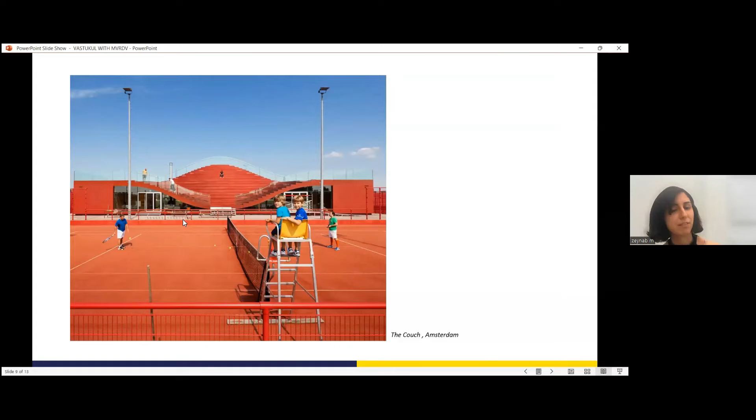MVRDV brings us together today. I bet every single designer among us, seeing the fact that we are attending, was inspired over the course of their education, training, or practice by MVRDV's designs. In my case, for example, as it could be for others, my first inspiration was the project The Couch, back when I was studying in architecture school, which to me seemed very simple, elegant, and really innovative. After that, I was really inspired by the Why Factory's vertical village concept. I'm sure that every one of us has a project in mind when he thinks about MVRDV.

If we look at their journey in the world of design, MVRDV was established in 1993. It's based in Rotterdam. Their aim was to transform landscapes for a better future. So simple, yet very important, and I think that they definitely succeeded. MVRDV has provided solutions to contemporary architectural and urban issues in all the regions of the world. Their highly collaborative and research-based design methods involve the clients, stakeholders, and experts. Their work is exhibited and published worldwide and has received numerous international awards. There are 250 architects, designers, and urbanists developing projects in a multidisciplinary collaborative design process.

Our guest speakers today bring different expertise from MVRDV. Let me start by introducing the first guest speaker, architect Mariya Gyaurova. Mariya graduated from UACEG with a master's degree in architecture. She studied architecture in Bulgaria and the Czech Republic. She has actively been a part of the diverse architectural project phases, from the concept design to the construction documents, and even construction site supervision, having this experience working at different offices in Sofia, Amsterdam, and Rotterdam. Mariya has been associated with MVRDV since 2012. Currently, she is the project leader, leading public and residential projects at different stages.

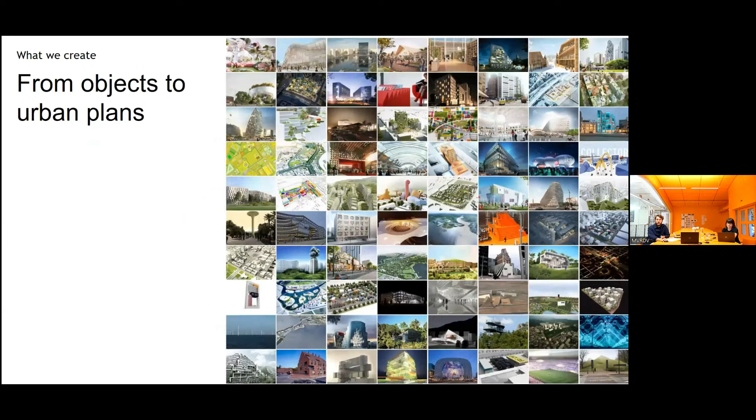Our scope of work is quite wide and goes from small objects to big urban plans that change the city. We could say that we do everything, but we learn from everywhere. We love this synergy of working in different fields, because one can teach you something that later you can apply to the other.

We believe in a highly collaborative, research-based design approach that always tries to answer global issues, but always with a contextual answer referring to the culture of the place. We don't copy elements from one place to another; we always try to understand what is happening on the specific site where we are locating our design.

We also try to be sustainable. Right now we aim to be 100% sustainable in the future. We're already taking actions like reducing our flights or having fully vegetarian, 100% local lunches in the office. Even this online lecture helps, since it isn't tied to a physical place, and I think online tools really give us a way to be more sustainable.

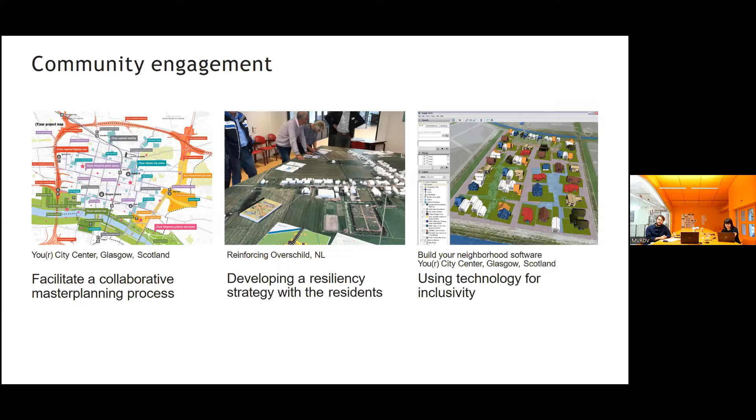We always try to involve and engage the community in our practice. This is part of the DNA of MVRDV. And through all of that, we try to share this knowledge through publications. I think Celia already showed the Vertical Village, or other books like KM3 or Farmax, which are among the highlight books we've done in the past.

And where are we located? As Jose already mentioned, MVRDV has offices in Rotterdam, Paris, Berlin, and Shanghai. Recently, our Paris office opened two weeks ago with an exciting exhibition called Agir, meaning 'to act,' where MVRDV and The Why Factory present the activist side of architecture and urbanism. But our true home is Rotterdam.

This is the MVRDV house, where we are right now, in one of the meeting rooms. We designed the interior of the house ourselves. It consists of a generous central space we call the atelier, which allows for immediate, informal discussions among colleagues, and different types of meeting rooms with various colors that celebrate diversity and improve creativity. If you have a meeting, you can pick a room matching your type of meeting, or your mood.

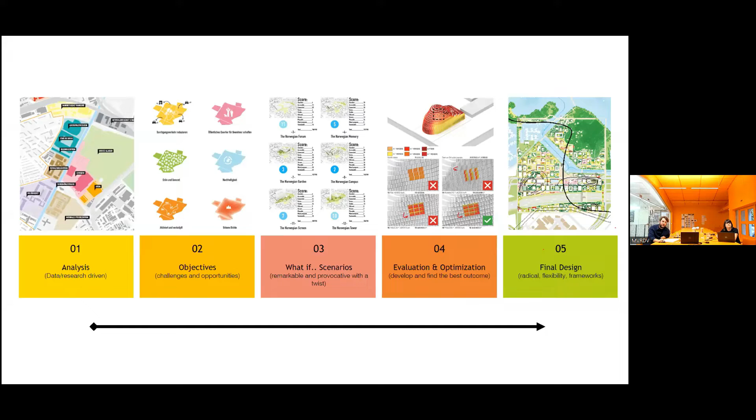So let's start first with analysis. For us, as we said at the beginning of this lecture, analysis is super important, because we believe in a research-based design process with clear steps towards an outcome.

Every project, in the end, is a result of a juxtaposition of thousands of different layers, from mobility, infrastructure, history, green, different. Of course, we never try to get to know all of them. It always depends on the project and its nature. Nevertheless, there are some which could be later really important for the project.

That's why we always try to analyze, for instance, the context. Analyzing the context and its dynamics is important to get to know the condition of the site. In this research, called Le Grand Puzzle, over 10,000 photographs of a street elevation were collected to map the city.

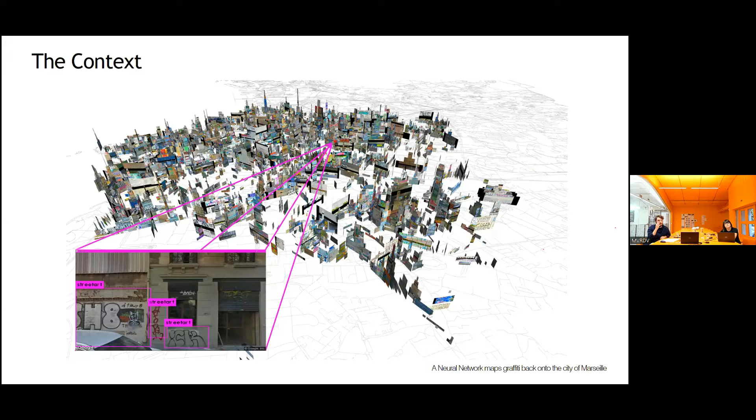Another layer that we always analyze is the program - the components, the relationship, the size, the grain of the program. Because when you discuss a master plan, it's not the same as creating a small residential block. The grain is quite different. This helps us later to be able to locate them in a correct order.

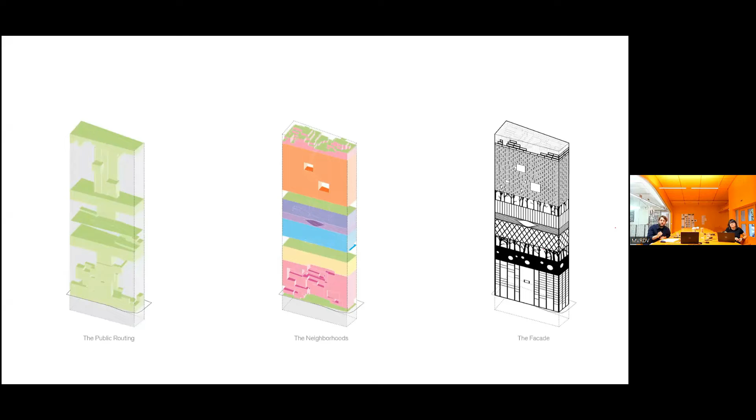Like in this tower in Australia, where each program becomes in the end a neighborhood on its own, giving a character to each block of the final stack.

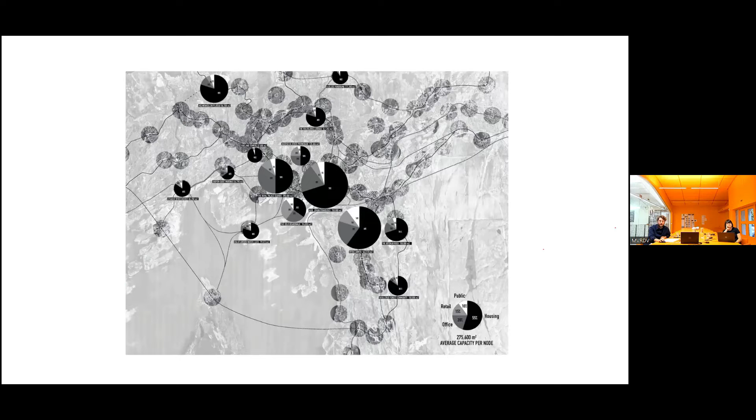Another layer to analyze is, of course, the infrastructure, especially nowadays where everything is hyper-connected - nodes, city centers, trains, etc. Understanding these nodes of transportation, travel times to the city center, accessibility, efficiency is important. Using this data in Oslo, we proposed to place all the program of the development along with the places with most potential for development, creating an equal level of densification throughout the city in this proposal.

Many times the best way to understand the constraints and opportunities of a site is through the inhabitants of it. In this case, our team worked with local communities and stakeholders to research the different problems of these sites, in the city center of Glasgow, across many layers.

What is their opinion about the green? What is their opinion about the public space, or basically the cultural elements that they have in the city? Their opinion about whether the streetscape is too busy, whether they want to pedestrianize the city center, or the mix of the city center. In the end, we got a holistic human perspective map, which unlocks all the potential of the city for this future vision of Glasgow.

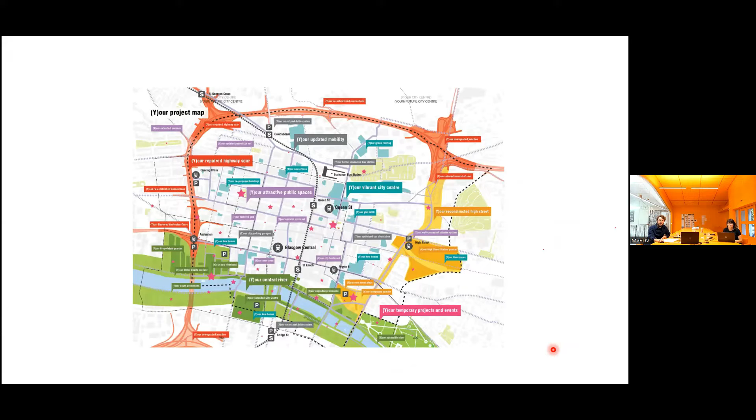And in the end, what we did is propose a series of projects that will collectively contribute to the upgrades of the city.

Another layer that we always try to analyze is the green. Why? The green network is a really important layer nowadays because we need to consider it and care about it. It's the base for all the biodiversity, and in the end, it's our connection to nature.

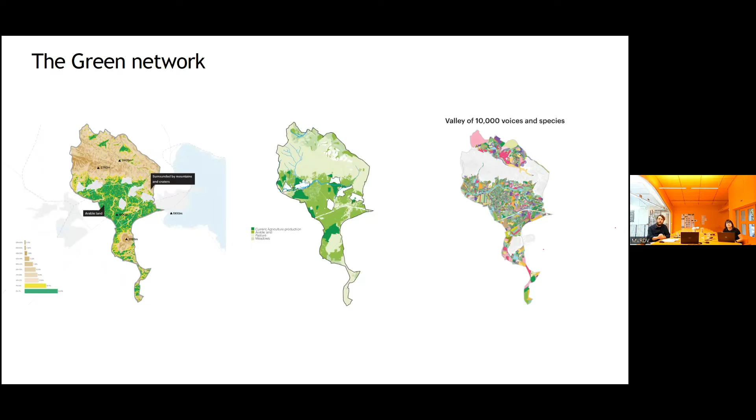In this valley in Armenia, our team did a really deep research of the current green networks and landscapes that was basically necessary to envision. Thanks to that analysis, the team could propose an amazing patchwork of over 10,000 different gardens that will enrich this area and connect the inhabitants even more to nature.

Another element to analyze is the future users, who will be populating our design - who they are, and how they will like to live. What are their needs? What do they need to create their own house?

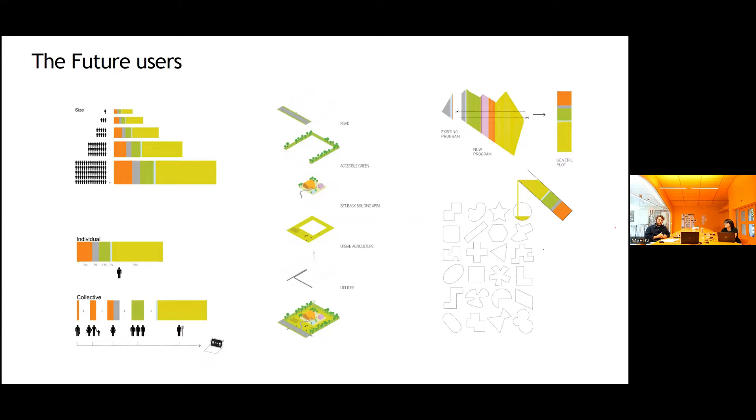For example, we could study the needs of the future user of this master plan to later design rules that will help them build their own plot house, ending up in this multiple patchwork of identity, like this plan in Almere, Oosterwold, where everybody can do whatever they want - if you want to live in a dome or a square, it's possible. You just need to follow basic rules, and you develop. It's like a do-it-yourself master plan.

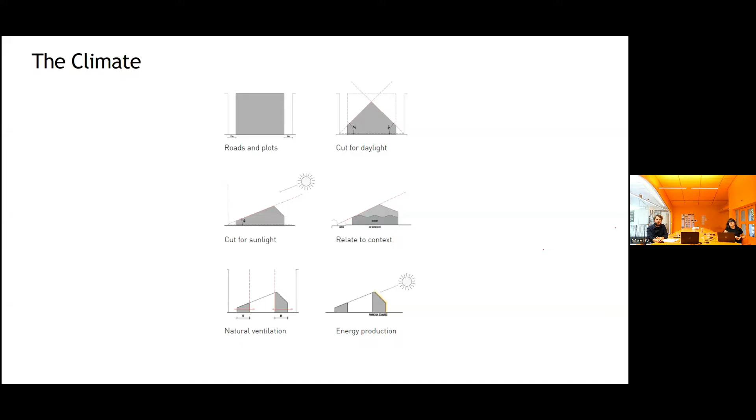Another important layer we analyze is the climate, and rules like daylight and direct sunlight could shape the building in a way that each building receives sunlight at ground level for a minimum of 2 hours. In this situation, these sun angles we create, combined with a 15 meter depth of the buildings, are the architectural rules that define the regeneration of this neighborhood in Bordeaux.

And last but not least is our beloved regulation. Many times we like to visualize and present this influence of regulation on buildings. By doing so, sometimes we're able to create unexpected forms that go beyond artistic intuition or geometries that you will normally know. We could say it's like a data-driven design.

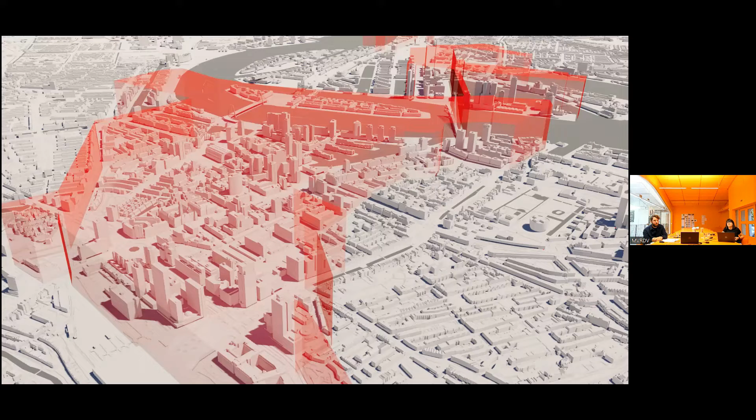This is a representation of Rotterdam, and currently in Rotterdam there are over 100,000 apartments planned to be added to the stock of the city, with a height of up to 200 meters. So as citizens, because we live here, we worry about how the streets will look, whether they're going to be really dark, or whether you will miss parks, for instance.

So we question this because we don't believe in absolute constraints, like the rule being fixed. Instead, we could say that as long as you don't cast too much shadow on a sunspot, you can do whatever you want as a developer, which we could call performative constraints. As a result, many more urban development possibilities are released from one single change of the sentence. This is basically a representation of the many possibilities that could arise just by following this performative rule.

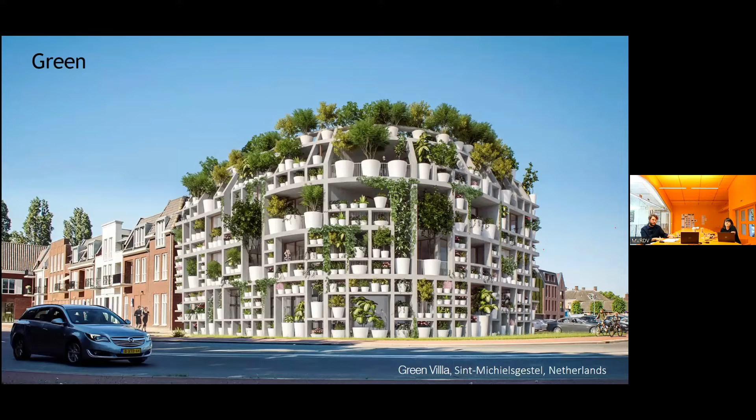Through analysis, we find the challenges and the opportunities in each project. We define our objectives: to be more green by bringing vegetation to the building facades and the roofs.

To be more dense by, for instance, creating instead of a cluster of freestanding buildings, a singular mountain structure with peaks and valleys, an efficient slab where more than 1,000 apartments are unified in one building, as we did in the project in Pune, the Future Towers.

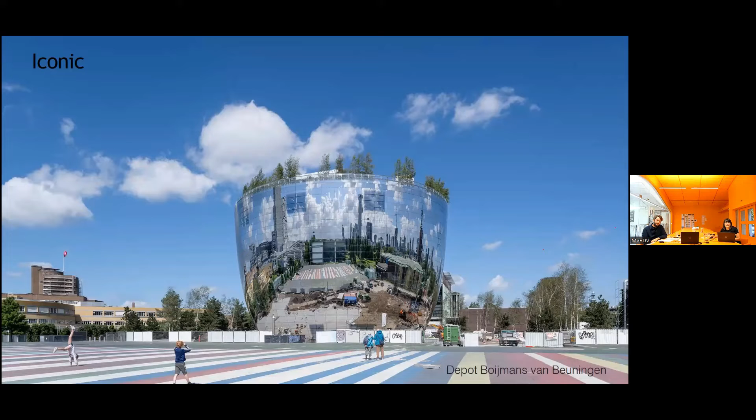Or to be iconic and to become the symbol of a city. This is the Depot Boijmans van Beuningen in Rotterdam that opened in 2021. It's the world's first publicly accessible art storage facility, and we believe an architectural symbol of Rotterdam.

We aim to create flexible spaces by designing buildings with extra high ceilings that allow for mezzanines and multiple changes in the floors added by future users, or by placing the circulation on the outside and completely clearing up the interior so that it can be 100% flexible and easily reconfigured.

But we also want to be fun. This is the project we did for a Dutch carpet manufacturer, and it is a patchwork of different colors and textures. What's really important to mention here is that it was created from the leftover threads from the production of other carpets.

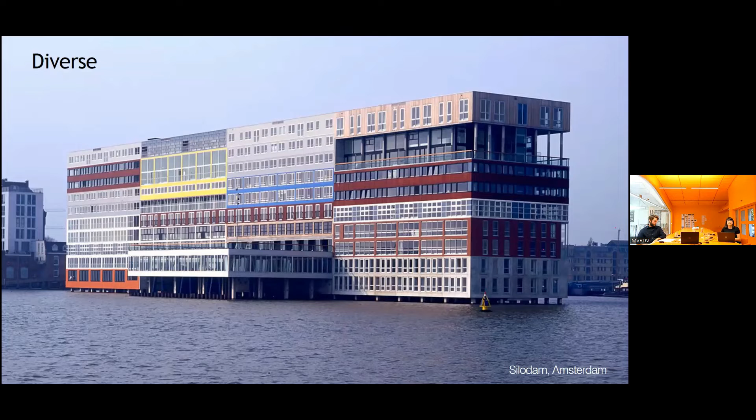We want to create diversity by combining various programs and types of apartments under one roof, like the building Silodam in Amsterdam, which is a stack of different neighborhoods, each with its own identity in terms of circulation, organization, units, and facade. It's a mixed program of housing, offices, workspaces, commercial spaces, and public spaces, arranged under one urban envelope. The apartments themselves differ vastly, not only in size, but also in price and organization.

And we want to create human scale designs. We aim for collective spaces where people can meet and share, spaces where we can all be together.

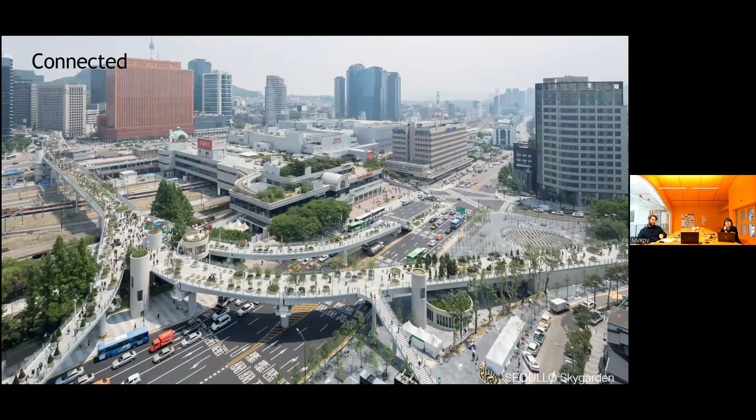We want to be connected by transforming, for example, an existing overpass into a public garden. This is a project we did in Seoul, changing the daily life of thousands of people who cross Seoul city center every day, and also every night.

And of course, we want to create pleasant places by creating more green and pedestrian areas in the cities. We aim to be sustainable by, for example, creating new possibilities for waste materials and inventing a completely new product.

A new product, like in this project, the High Profile, which was inspired by a visit of the team to the factory where they spotted the stack of aluminum profiles and all this raw material and waste. It became actually the starting point of the design.

In that way, we also designed the Bulgari Jade-like facade in Shanghai, which is made of brass and recycled champagne bottles.

We aim to be innovative by using material in a different, unexpected, and unique way, creating new building techniques and working closely with a number of partners, like in the Crystal Houses in Amsterdam. The bricks were developed in close collaboration with the Delft University.

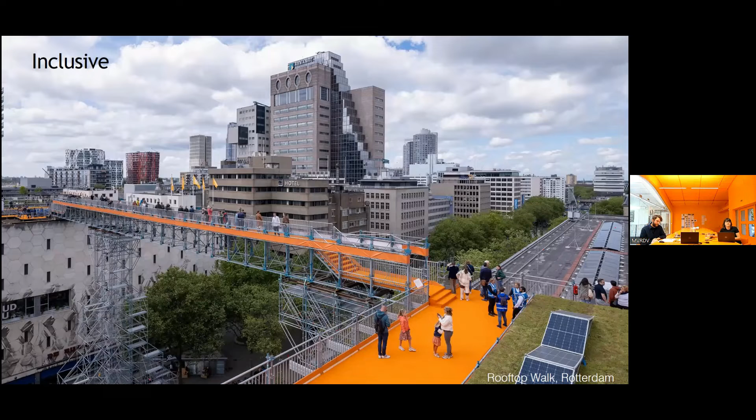So from this first analysis, these objectives and ambitions that we set, we ask the question of what do we do or how we do it. We need to answer those questions in a way that fulfills all those ambitions.

To do that, we do in our methodology what we call scenarios. Design for us is a result of this iterative process, which in the end allows the best design to emerge out of those. It's an outcome that is based on objectives and ambitions.

And these scenarios are created, for instance, based on different elements. We can create scenarios based on extremes.

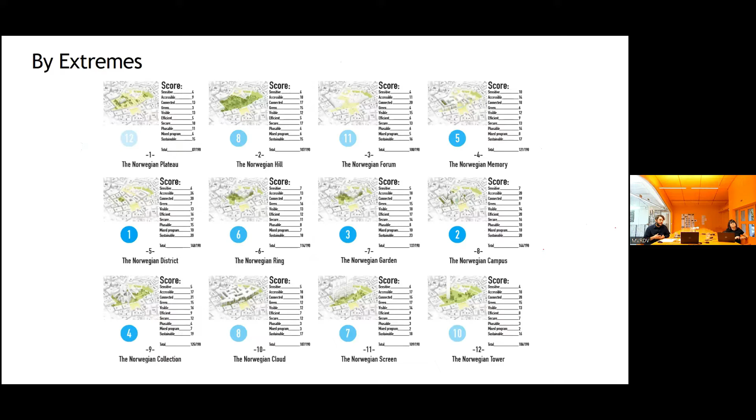In a way, we could think about radical elements or radical scenarios, like, for instance, create a plateau in this project, or we can create a big hill - what a huge hill will do to the city - or a garden, what if in this project we do a beautiful garden that welcomes everybody, even though it's a private plot.

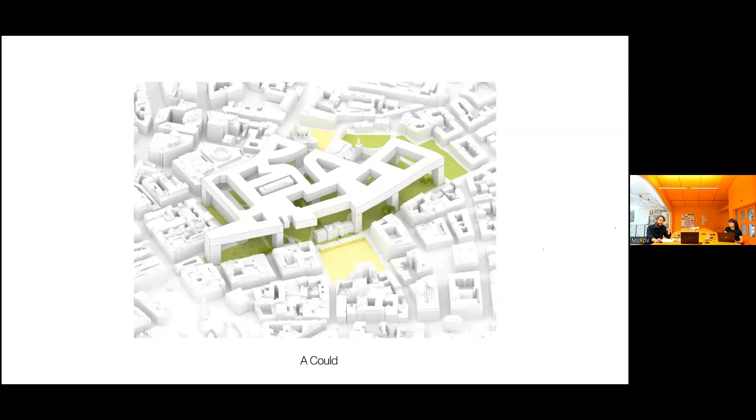Or what if we do a collection, a collection of different objects with different identities together that becomes this new icon in the city? Or what if we do a cloud, a cloud that basically serves as a canopy for this amazing plot, and the people can gather and play under it?

Or what if we do the biggest tower? I know Manhattan would love to have this, but what if we do it in Oslo, the biggest tower that you can see from everywhere in the city?

Or a campus, a beautiful campus with different identities and different buildings. You can choose where to live - you can live in the S building, or you can live in the courtyard, or in a tower.

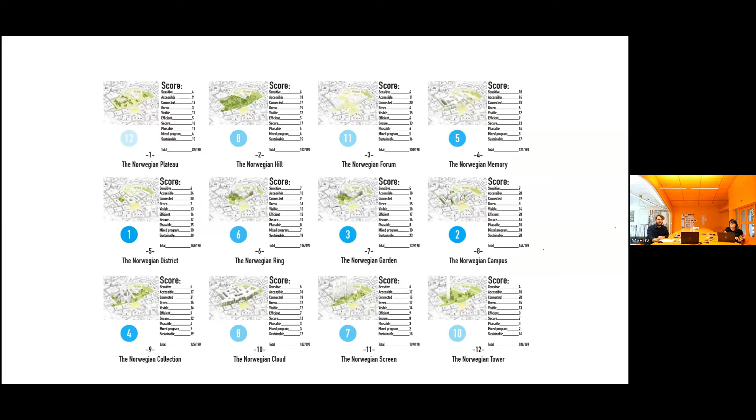These are scenarios, in the way we create them, because they are a benchmark from which our final concept will arise. Of course, by creating extremes, what we try to understand is what do they do, in order to choose the design that best serves the city - or sometimes it's as simple as just doing, in the end, a beautiful courtyard for this project in Oslo.

Many times, this scenario could be based on program distribution. These are pictures of our exhibition now in the New Institute in Rotterdam, where thousands of physical models were collected.

These different possibilities of organizing the program along a building - in this case, we create different ways to discover it. Do we simply stack the program, or can we create different identities along the building? Or we think about a route that through the whole tower you can discover.

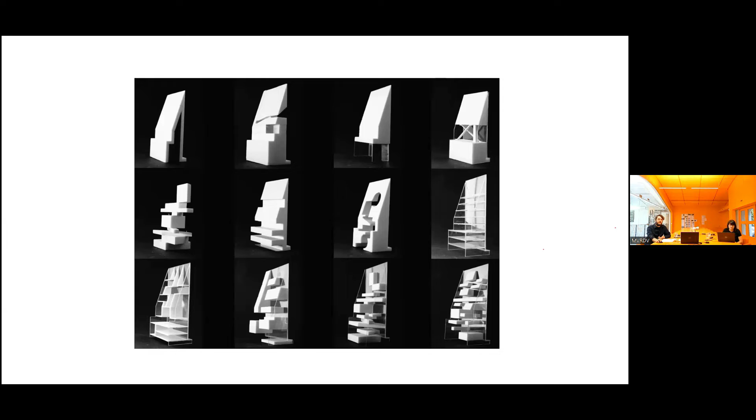Or we could create scenarios by typologies - do we do a tower, a courtyard, or row houses? For this master plan, we check these possibilities that each block could bring. Then later, as a result, we could decide to select all of them in a dynamic intervention for this master plan in Moscow.

To sum up, we start from analysis, which is analyzing the important layers of our design. Then, thanks to that information, we create concepts that will better answer those questions. Sometimes the target is a compromise or balance within different scenarios, but other times we have to prioritize, and one ambition will rule over the others, like being green or being iconic. What we want to make clear now is that every action we do has a reason, and it has a nature to its existence.

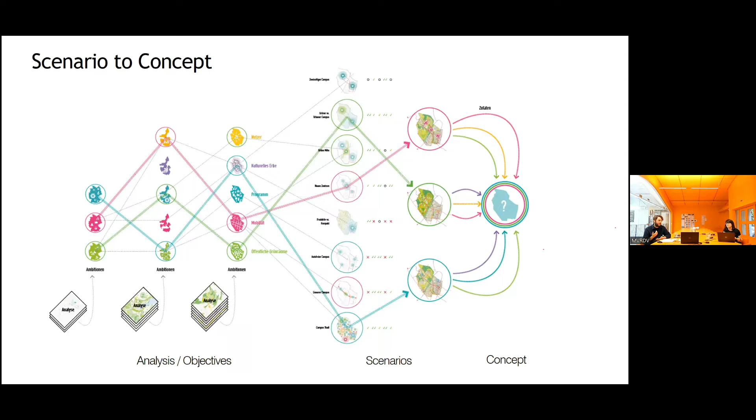Every scenario fulfills elements of the objectives, and none of them will have only one objective to fulfill in a banal way, like just doing something iconic for the purpose of being iconic.

But how do we tell the story? How do we explain the project in a way that is very clear and easy to understand? We do this by creating the narrative. The narrative is always an integral part of the MVRDV DNA, and we visualize this usually with a step story or a concept diagram. We always come back to these diagrams throughout the whole process, to make sure the story is clear, easy to explain, makes sense, and the concept is maintained.

In this chapter, we have prepared for you a set of concept diagrams that were created at the beginning of the process and then combined with the end result.

Concept diagrams for the Boijmans Depot in Rotterdam. Here you can see first we outline the plot where we can build. Then we define the urban situation, the urban restrictions. In this case, what is very important is this access between the new institute and the Kunsthal. Then we position the building, we extrude the program, all the square meters we put on the site. And then we round the facade so it doesn't have a backside—it just has a face to everywhere, to the surroundings.

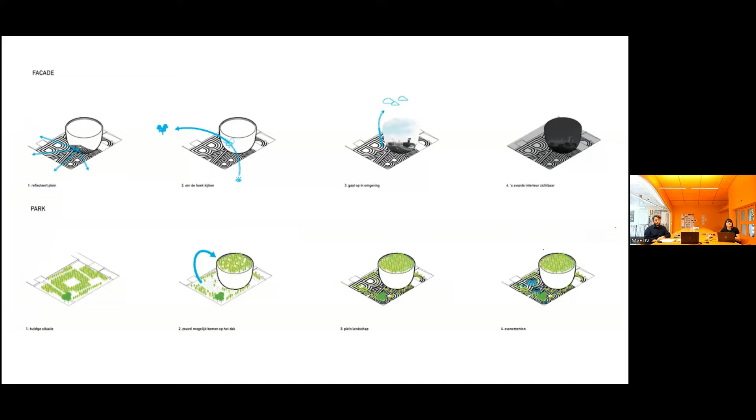We also like to do explanatory diagrams to clarify the landscape concept, the facade, the structure, the green, the terraces, and all the important aspects of the project. This is the Boijmans Depot, built in 2020, and it's one of MVRDV's dreams that came true.

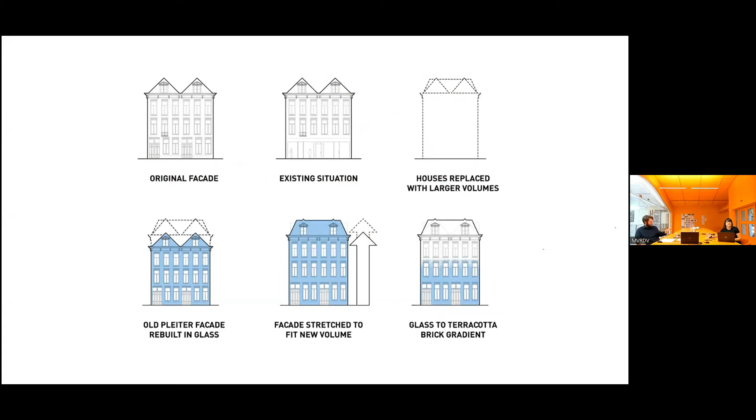This is the concept diagram for the Crystal Houses. That's the original facade, how it was, and this is how the existing situation looked when the project started. This is the urban prescription, how the volume would be in the future. So the first step was to rebuild the old facade but in glass, then stretch the whole volume to fit the urban parameters, and then create this gradient between the traditional bricks and the newly developed glass bricks, combining the Dutch heritage with international architecture.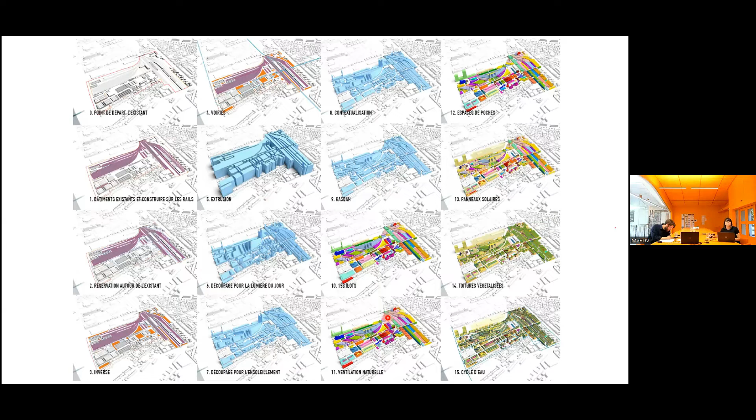Basically, it's the same concept. We extrude the plots, and then we start cutting with planes that create these unexpected volumes at the end.

This is the milestone project we did. We extrude the plot. You can see this, it's a GIF, so I'll go through it quickly—I'll just start and repeat it.

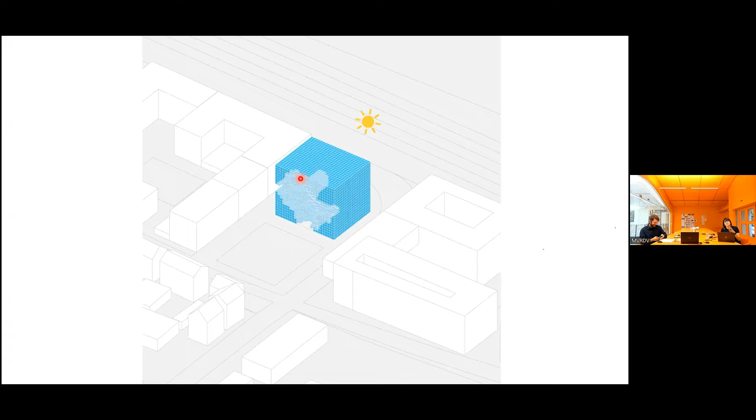We extrude, project the map of the area, and then project the landscape. We push to create diversity. We open up, making a void to get more sunlight. Then we bring all the program that we excavated back on top. We optimize the location of the building on site, and then bring a public layer into the void to create the landmark for Esslingen in Germany.

So, of course, we have created our concepts. We've gone through this process of analysis, objectives, scenarios, choosing which concept or scenario fulfills our aims better. But of course, we don't stop until we optimize the best version of it.

This evaluation process that we'll show you now is normally related to certain elements of the concept that really enhance it.

At this phase, I'd also like to introduce one of these transversal studios I mentioned at the beginning: MVRDV Next. They are the people in charge of developing and testing all these different tools that I'll show you now, which later help us, the designers, study and evaluate the different performance of the building on different topics.

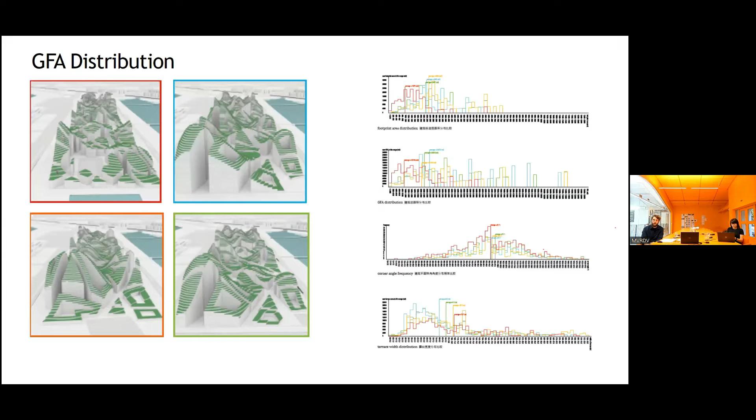Then, with those parameters, we not only calculate them, we can even visually overlap all this information in order to see which one performs best in relation to these principal goals. You see in this GIF these 4 different master plan scenarios overlapping each other, and we can check which block is bigger than the other, and which option has the least amount of footprint, for instance, in order to choose the final result for this Tencent project master plan in China.

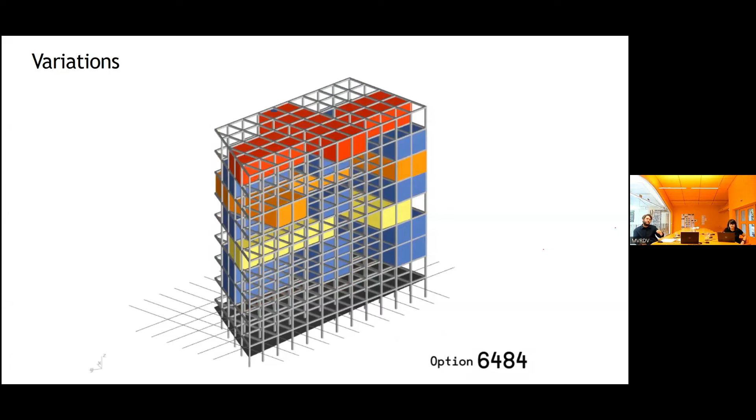Sometimes it's not easy to choose because you don't always have the best one—you need to compromise to find a balance. But these tools are also quite unique and helpful to use for discussion with clients, because we have our ambitions, but they have their ambitions too. So in the end we can have negotiations and discussions with them, to pick and choose or move up and down, and ultimately select the final result that we like the most—like this building called Le Rack in France.

Another element to evaluate, and most important nowadays, is the climate performance—the daylight factor, the sun hours, the wind, the shadow, and how its compactness affects the heat it creates.

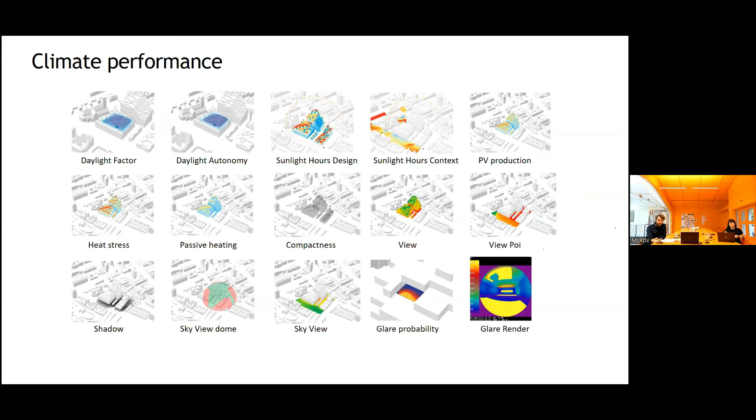In this project, it was important to analyze the different angulations and distributions of these solar panels, so as to get a position of the panel in a particular place that achieves the best solar gain possible. You can see different studies here depending on if it's placed flat or angulated towards the sun, gaining different values of energy to have in the end the most optimal solar facade ever, like this Sun Rock that we developed in Taiwan.

Or how to get solar exposure into apartments. We have seen already a few examples of how we really like to use the sun and the climate to shape our buildings, even though they look spectacular, we always want them to be driven by a reasoning.

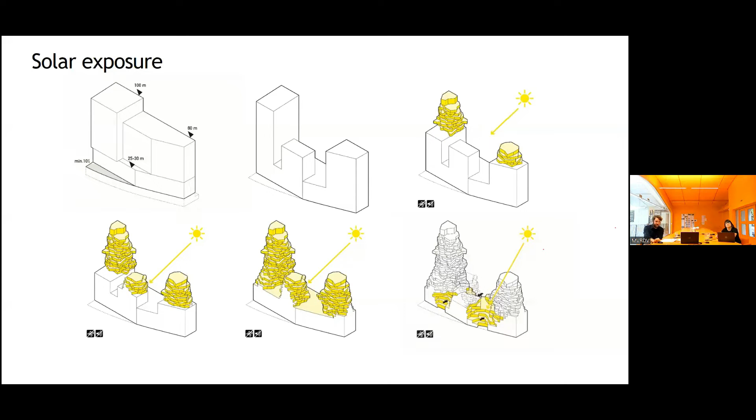So in this case, the building envelope was three towers and a plinth that we carved out according to different parameters like sun, view, and terraces. We wanted to not only carve out but also improve the energy efficiency and sustainability of this project, while also ensuring that our design intent is intact.

So when we incorporate all these wishes into a criteria and create this algorithm, we can test and compare countless possibilities. This parametric model helps us to actually simulate an assortment of these options that we have seen before, to later choose the one that best fits our wishes, like this valley that we have presented before. It's finished, you are all welcome to come and visit it because it's quite impressive actually in life.

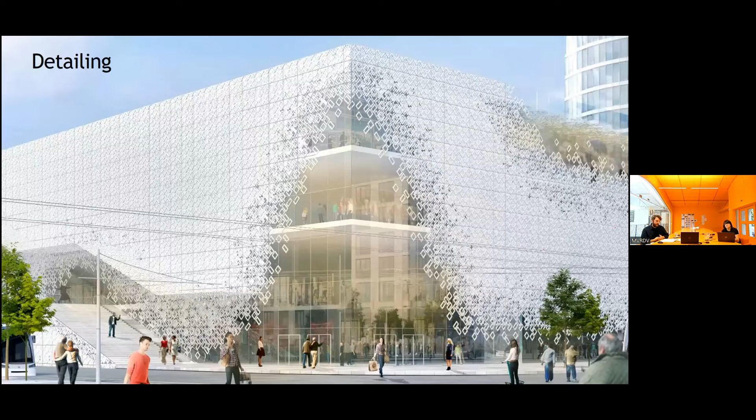This evaluation and optimization is not only on a bigger scale of the building or the floor, it could also be related to detailing, to small details of the project that really make the project shine.

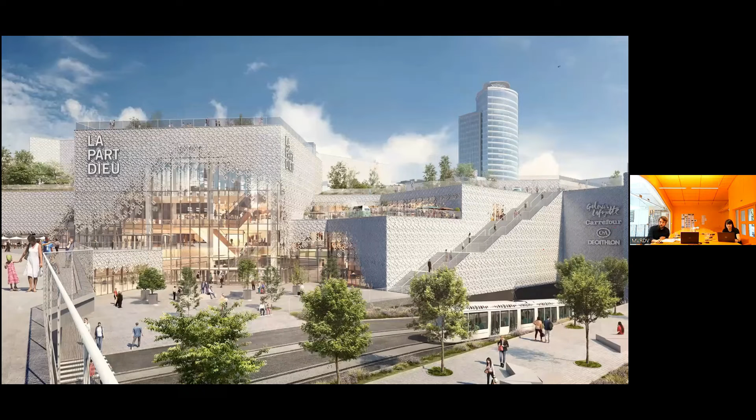In a way it's like an old facade that opens up to the new, and we're finally realizing it, like we are doing in Lyon.

Last but not least, we not only develop tools specifically for our projects, we have also developed an internal tool called Carbon Escape, because we think that nowadays it's quite important to analyze the impact of our projects on Earth, what is our carbon footprint. Recently, all these calculations are done in the later stages of the design and not really at the beginning. So we think that calculating this carbon will effectively help our designs and, of course, our impact on Earth.

From study models, we check the possibilities of spaces, and then we explore the different impact that it's going to have compared to benchmark scenarios.

This graphic is really important because, as I said before, these carbon calculations are normally made in later stages, but by doing these calculations at the beginning of the process, we think we could have a really big impact on how this building will perform in the future. So calculating the impact from the beginning is going to have a more important result.

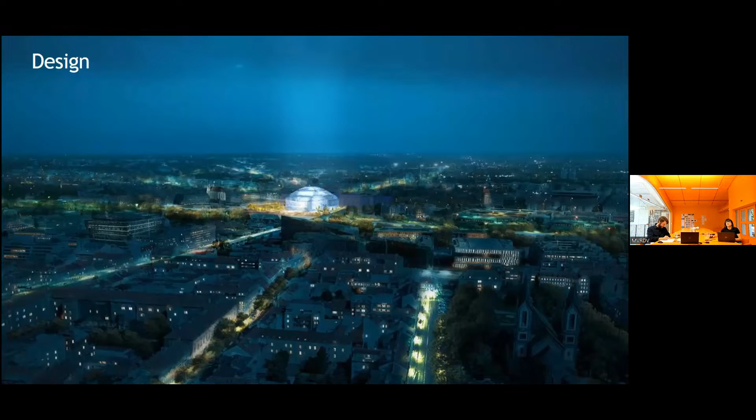Then it could also be a realization, yes, on a very small scale like the pavilion in Germany, or a very large scale realization.

But it could also be an open framework where certain urban parameters and conditions are defined by the architects, and then the users can actually build whatever they want within these parameters. This is the Almere Oosterwold master plan, and basically you can build whatever you want there in whatever shape you like. You decide how to use your space, how to behave, and you can build the home of your dreams. You can build a castle, a dome, a prefab house, but if you feel comfortable living in a tent, go ahead, you can just place your tent there.

The important thing is that you can build whatever you want, but you have to do it yourself. That's the main principle.

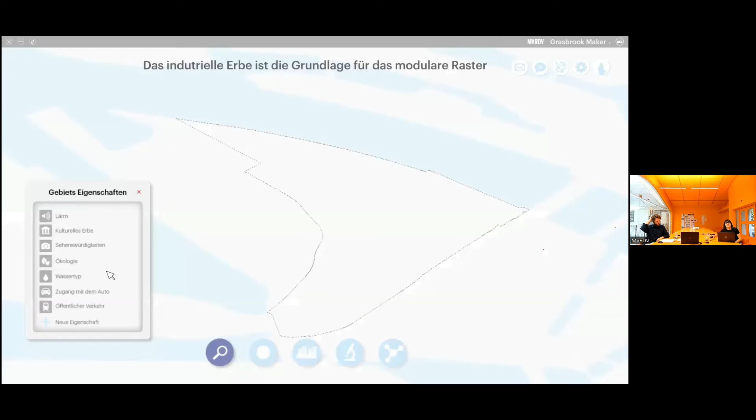And the final result could also be a game, giving users the opportunity to create their own master plan or their own home. This is a project developed by the Y Factory, where each home is based in size and shape on the desires and needs of the users. Sometimes we end up with a catalog, exploring all the potential applications of a certain concept, like the potential of roofs.

Now, in this last chapter of the section, we would like to go into more detail and present selected projects that we, with Jose, worked on, in order to show you how the methodology is actually applied in the projects. So I give the word to Jose to explain the first project.

Okay, so I think we have already gone through our introduction to our methodology, but as Maria said, we'd like to also share a few of our own projects. I think it's interesting to see how we develop them, and if you have specific questions about them, we can answer in detail. So the first project I will present is called Barapullah Springs.

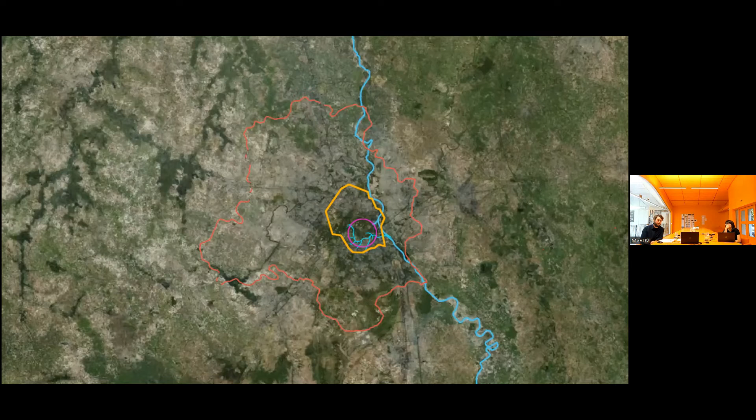We are located in New Delhi, and I expect that many people in this meeting know the place or the city. In New Delhi there is an open ditch called Barapullah Drain that is around 12.5 kilometers long and runs through the center of New Delhi. This has a huge impact on the structure and the urban fabric, because being an open ditch basically means it's like a cut.

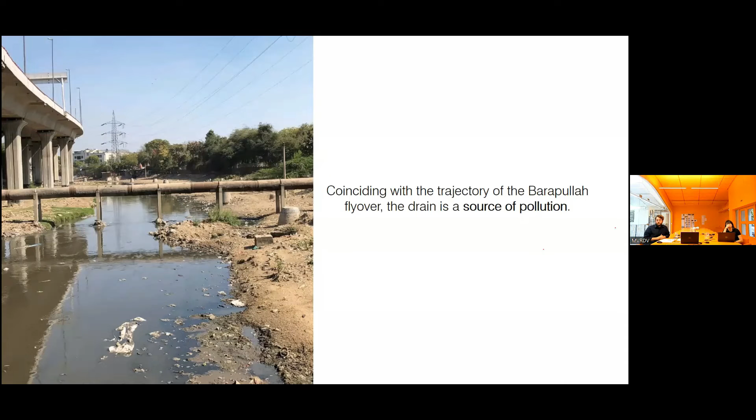A scar that you have in the city, giving this sort of wasteland landscape that we don't want to see in a city. So what does it mean? This drain, well, it's called Barapullah Drain because it coincides with the Barapullah flyover. And as you can see, it's a big source of pollution in the middle of the center.

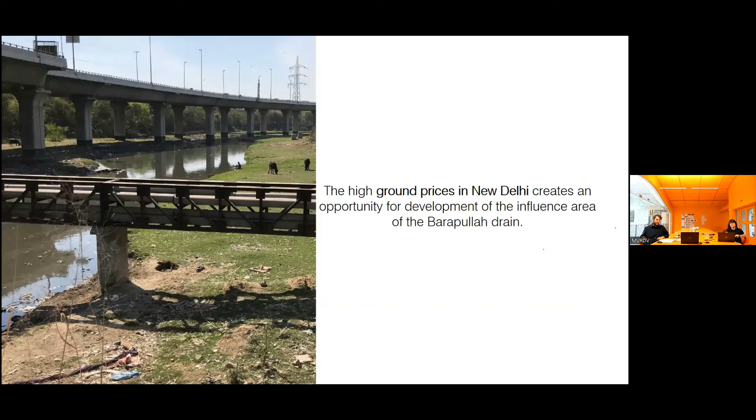Due to this situation and its nature, it creates what we see as a large strip of unused land. We calculated it's around an offset of 100 meters from the drain, where you cannot see any relevant public program. So in the end, as I said, it's like a wasteland. But of course, nothing is negative. When you see a problem, normally at MVRDV we like to see it as an opportunity, so every problem you can always turn around and find the optimism and the opportunity in it.

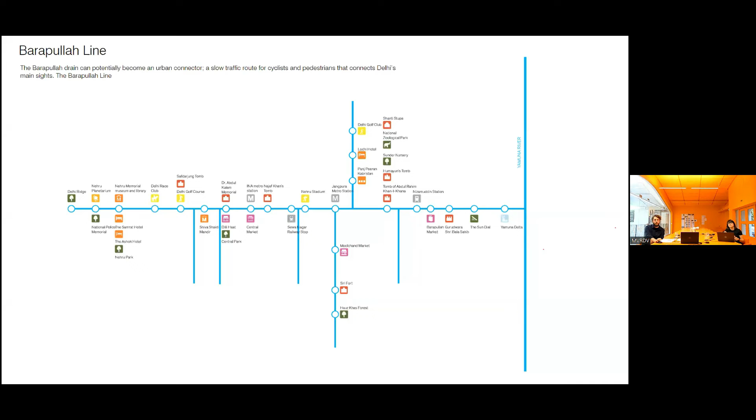So we could envision that this Barapullah sewage or drain could become a sort of Barapullah line, an urban connector. Imagine a slow traffic route for cyclists and pedestrians that were previously unconnected, and now with this Barapullah line, like a metro line, you can go inside and decide where you want to finish. So with that, we move to our ambitions.

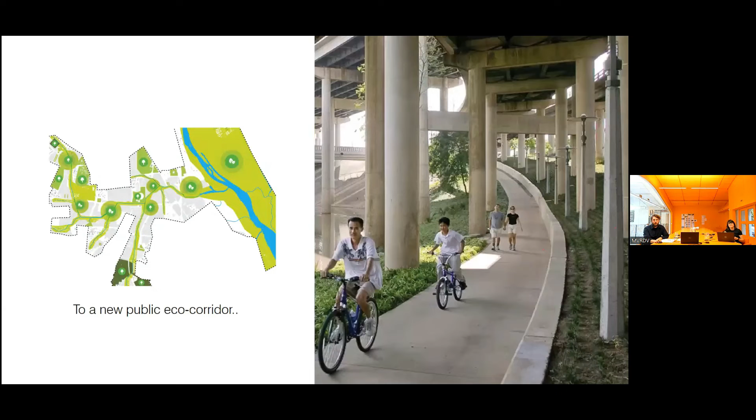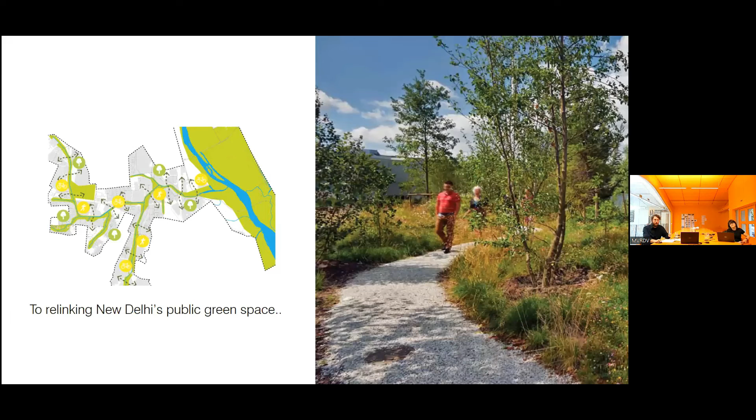We envisioned that from this polluted open ditch, we could create a vibrant river and source of potable water. From this disclosed wasteland, we wanted to create a new public eco corridor. From these sorted public facilities, we could envision introducing new exciting programs. From this urban barrier, we could think about relinking New Delhi with new public green space. From these obstructed roads, we could think about reconnecting all the neighborhoods next to this drain. And from this unused land, we can create new density of affordable mixed development housing.

All these combinations together form what we call Barapullah Springs, a new green connection linking different neighborhoods of New Delhi through this green network.

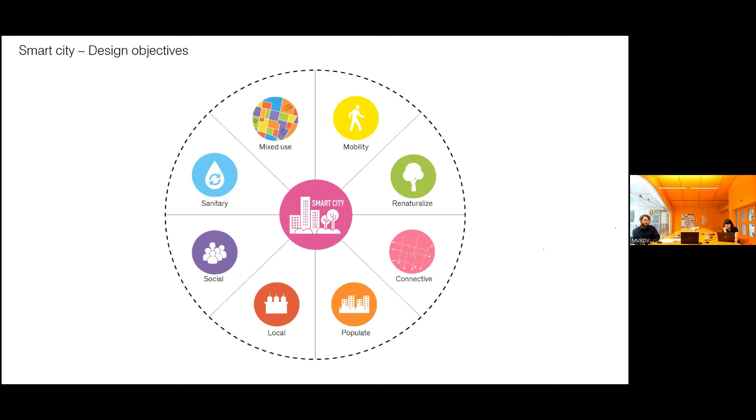From this analysis, these ambitions also fit with the idea of New Delhi being a smart city. We wanted to be mixed, we wanted mobility, we wanted more nature inside the city, we want to be connected, more local, social, and of course one of the main topics here is sanitation. From these topics we developed a strategy in a step story, step by step and phase by phase, that will change the current status of this drain into our beloved Barapullah Springs.

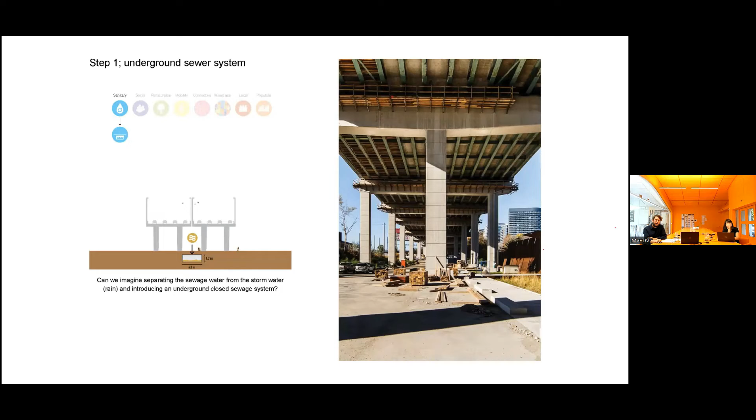So this is first, our current situation. I forgot to say that there is a regulation of FAR max of 4, if I recall properly, and this regulation is based on the availability of potable water. So actually, if we create more fresh water, we can increase this factor and create more urban development. So from this step 0, the first thing we would like to do is barrier these streets and separate the storm water that will come later to the gray water and black water.

By doing so, we can create these canals that will collect the rainwater, and later we can relocate it to an underground canal that can serve potable water to the neighborhoods next to it. This is something being developed right now in the area - we can create small treatment plants, locating them along the drain, and cleaning the water with plants, we can also use it for the neighborhoods.

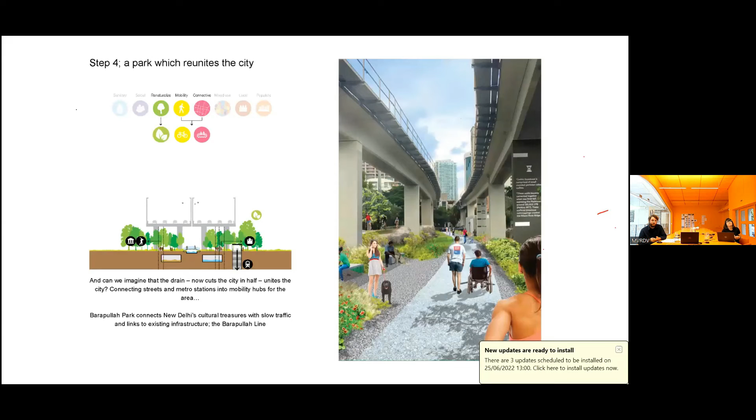In the end, with so much water, what can you do? You can think about actually introducing nature again. With this amount of water, we can create this Barapullah Park and also the Barapullah Line, a beautiful park that connects all these points of the city center. But we can go even beyond - what if we also program it? It's not only a park, it's also a place where activity happens, where you can go during the night, during the day, create events. It's sort of a beating heart of the city.

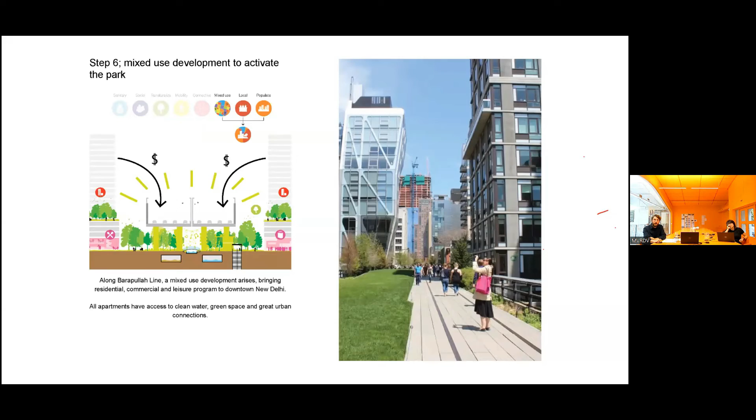But the last question is, how do we actually pay for all of it? It's beautiful to have all this investment, but we don't know how to compensate and balance. As I said before, this brings a potential to bring a big strip of unused land that later we can develop and redevelop to bring back the investment of the Barapullah Springs, and in the end have this beautiful new corridor in the city center of New Delhi.

So from this wasteland, which I pictured a bit sad, we can think about going a bit beyond and create this Barapullah Springs that sometimes will bring us different pictures. Of course, we'll reuse the water in new ways that we could see in Italy.

Now I'm going to show you a project that I've been working on for about 3 years. This is the Pixel project in Abu Dhabi in the UAE, which is currently close to completion. I mainly worked on the feasibility study stage, concept stage, the SD stage, and DD phase and site supervision.

The building is located in Abu Dhabi, in a new development on Reem Island, in a district called the Makers District. The main values of the Makers District are creativity, learning, and sharing. It's a development aimed for locals, but also for expats. The district provides a creative counterpart to the city's cultural hub on Saadiyat Island, where all the museums designed by worldwide known architects are placed, like for example the Louvre by Jean Nouvel.

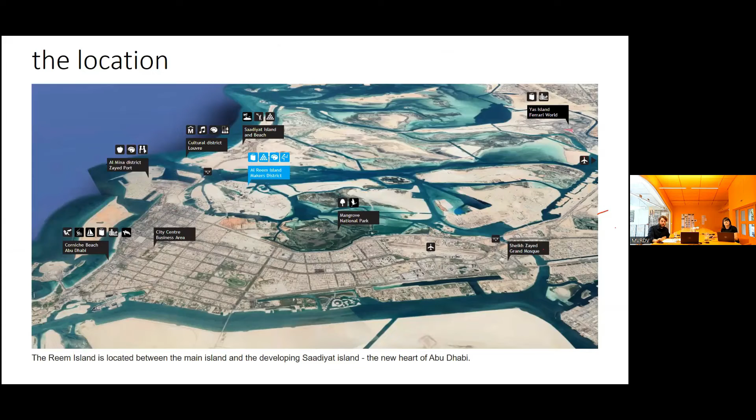So how do we start? We always start with analyzing. What do we analyze? We first analyze the site, we analyze the surroundings, we see what's there and what is currently there, what is missing, and most of all, what can we bring as architects? And here we could see that the prevalent typology in the UAE is disconnected towers, which are lacking outdoor and community spaces.

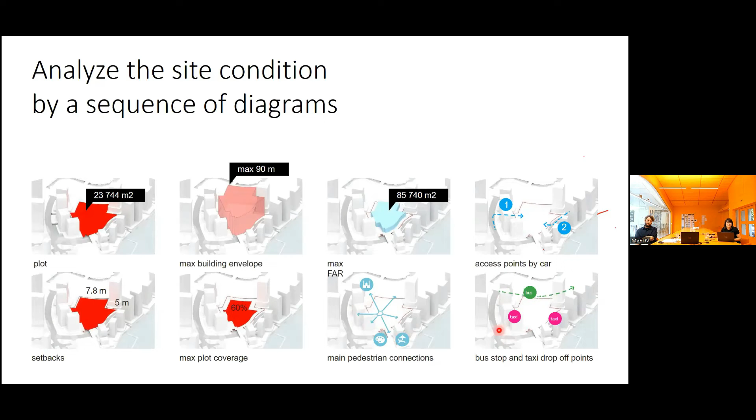And then we analyzed the main pedestrian connection, what we have to keep on ground floor and which area to create, like in that case, the mosque with some cultural buildings and the beachfront. We also checked accessibility by public transport and taxi drop-offs.

We analyzed the brief. We were asked to do 85,000 square meters of retail, apartments, offices, and 45,000 square meters of underground parking. We visualize it always on site with different colors.

And then we define our objectives: in this case, to embrace the outdoor, to create a sense of community, to create a mix of apartments, and also to bring the human scale to this area, which is very uncommon in this part of the world.

We create scenarios. We started with creating scenarios, and what Jose already explained in the first chapter, what if. So we start asking ourselves, what if we create these courtyard blocks, or what if we create a grid, or what if we create sun blocks, or a continuous slab with a huge courtyard, or what if we cover the whole space, because the area is really hot four months in the year. So what if we just create this huge covered plaza?

And we analyzed all these directions. Eventually we try to reduce the options and we reached 3 options that we were asked to present by the client, which was the mid-rise towers with the human scale plinth.

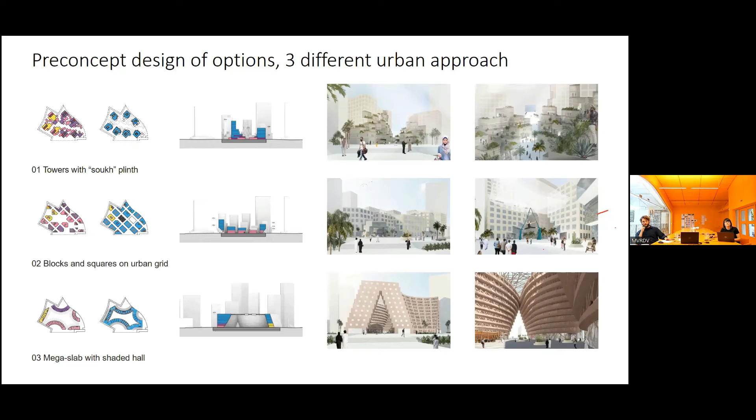We put the options on the table, we discussed with the client, and the client definitely preferred option 1, which was also our favorite, luckily in this case.

And then we diversify the 7 buildings in height to maximize the shadow and the views. And we extend the maker spaces to the ground floor to make this connection between the tower and the lively plinth and the public realm.

And we materialize it. We materialize this lively public plinth to connect it with the public plaza. We aim to create an exemplary project of outdoor living and community spirit in the UAE.

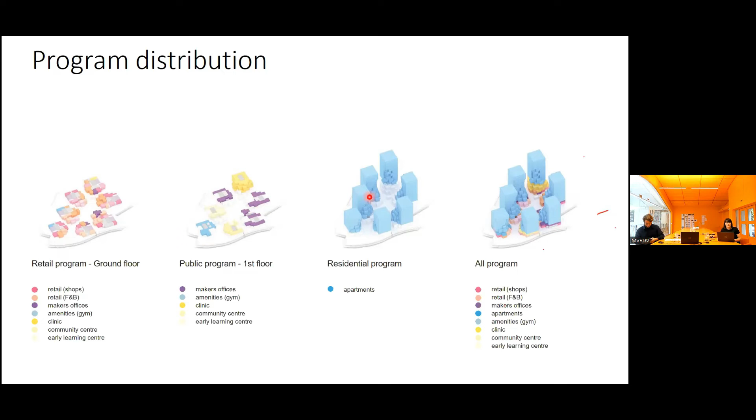There is underground parking access, pedestrian access on the site, all over the site, and then the apartments are reached by 7 cores, central cores.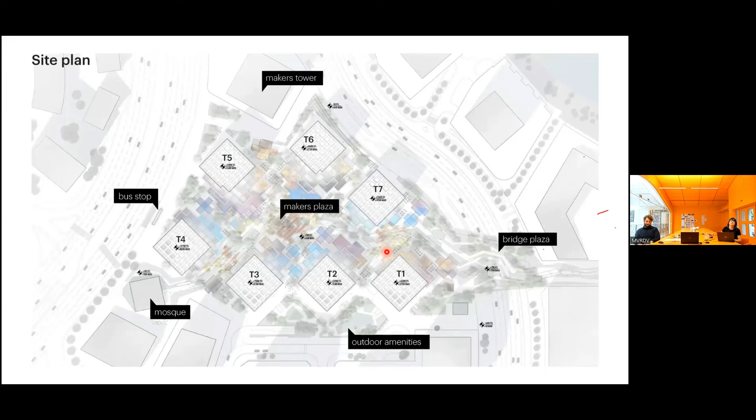The towers are deeper at the bottom, and they have smaller footprint on the top. And that suits very well the functions, which are retail on the bottom and then offices.

And also, what is good to mention here is that above the offices, there are actually luxurious apartments, which is uncommon to happen on the lower levels, right? Usually the luxurious and high-end apartments, we find them on the top of the tower.

But in that case, because we bring so much quality in the public realm, there are a lot of big luxurious apartments with big loggias at the lower levels, so that the apartments can actually benefit from the creative and vibrant public realm. This is an overview of all the levels, starting from public to private.

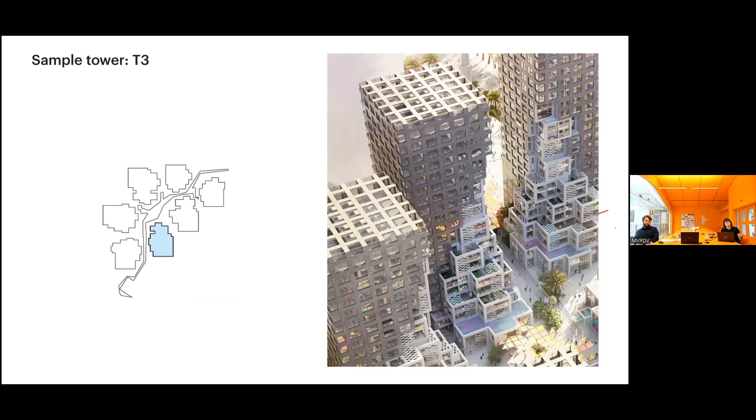This is a sample of one of the towers. There are shops and restaurants, and volume is sometimes cut to create narrow, cozy, shadowed passages, creating a cozy feeling for visitors, and also mini plazas.

On level 1 are the offices, which are quite flexible to be separated. In the residential part, an essential element are the standard apartments, which are the perimeter apartments, and then there's a percentage of special apartments towards the inside of the development, with more views and more outdoor spaces.

The unique selling point of the project is that the apartments are quite narrow, meaning they have more bays and more windows, bringing more sunlight. The living rooms are always at the corner, or they are 2-bay living rooms, as you can see here. So we try to avoid the typology of really deep apartments with a one-bay living room and the kitchen at the back.

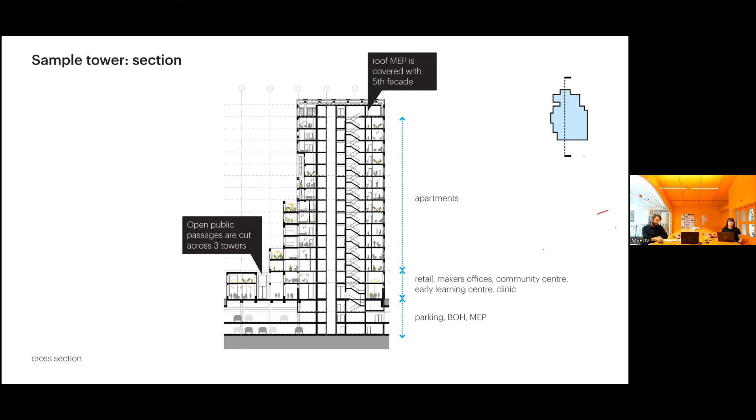The MEP is positioned on the roof, and we cover it with a grid to ensure the fifth facade of the building looks nice from the top, which matters since the development is surrounded by tall towers.

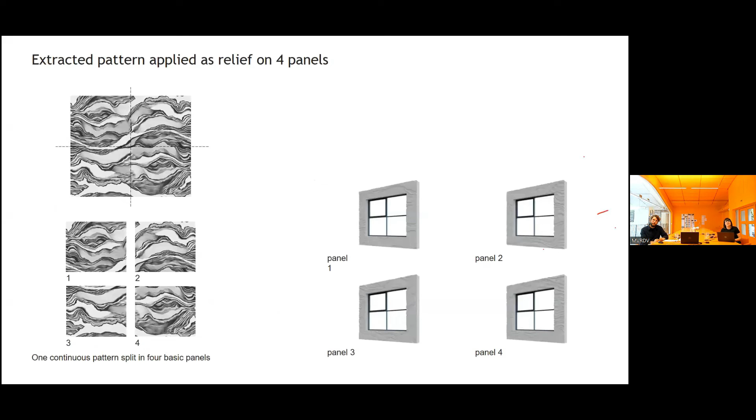We have two types of facade: the grid perimeter facade, which is more sober with big windows, using textured concrete panels with a gradient. We worked with an Amsterdam designer who developed a nice pattern inspired by the shell, creating 4 panels distributed within the building, bringing a gradient from darker at the bottom to lighter on top, with stronger relief at the bottom that disappears toward the top of the building.

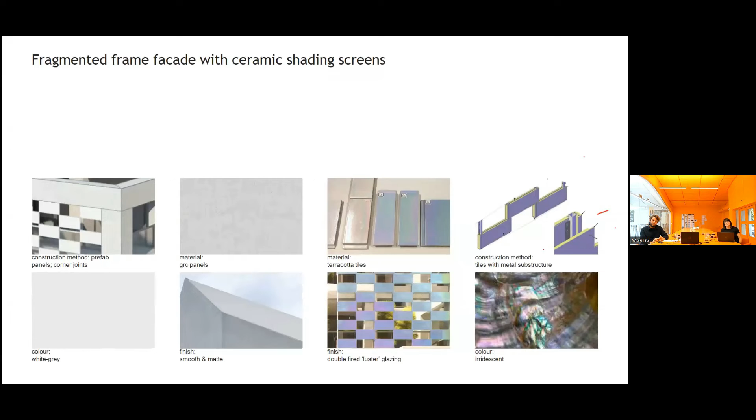The interior facade has pearlescent shading devices, inspired by the Abu Dhabi pearl, which brings colors and creates a vibrant environment.

We also designed the common spaces ourselves. It was also in scope, and we picked different colors. Each core has its own identity and its own color, which is carried from the ground floor to the top of the building, throughout the whole core.

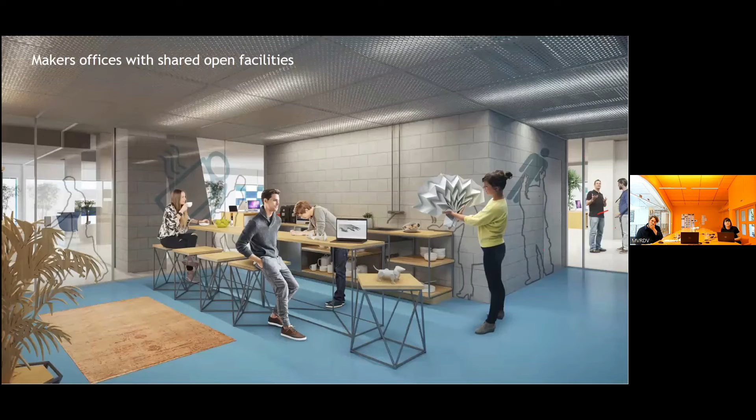This is one of the lobbies of the tower, and the shared spaces on the office levels. There is a gym and amenities for the residents.

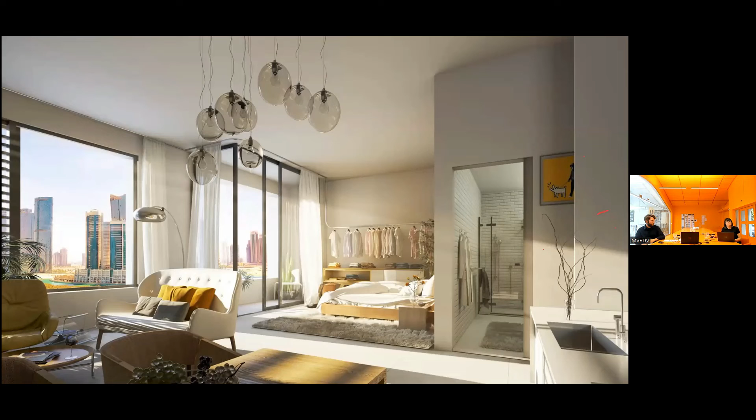These are the apartments. There are 525 apartments ranging across many different typologies. As mentioned, we optimized a lot on the floor plans and special typologies to make them work for the client. This is a studio, a 1-bedroom apartment, a 2-bedroom apartment, and a luxurious penthouse.

These are some images from the construction, and this is how we imagine the project will soon look like.

I'm going to pass the word now to Jose to explain the last project. Thank you, Mariya. I'm going to run a bit fast so we have more time in case some of you have questions. This is the last project we're going to present today.

This project is located in Mumbai, specifically on the street Senapati, in the area of the Lower Parel of Mumbai, where you have this long street of Senapati, 11 kilometers long, though we are only focused on 800 meters of it.

We came to this project because we were contacted by local architects called StudioPOD, and I need to mention them because they were the lead architects in this case, the ones who were able to create this project. They contacted us because they wanted our expertise and input on how to improve this small piece of street.

This street has a really big history, from the cotton mills to the current situation nowadays. It's a bit reminiscent of Barapula in New Delhi, like a no man's land, under this flyover. There's only some green going on with a small fence, surrounded by the big traffic congestion that runs through the street every day.

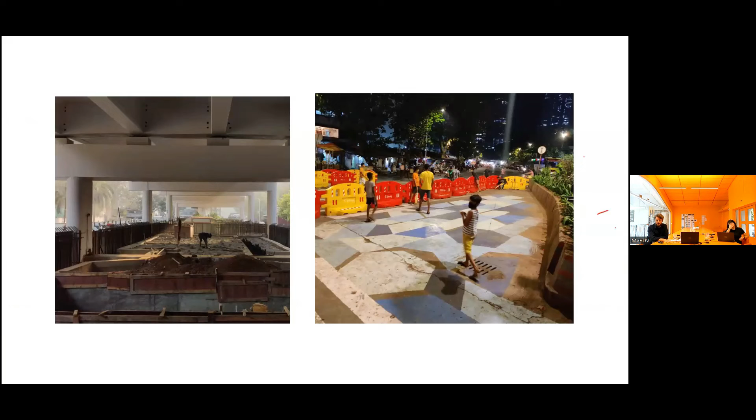Studio Pod started this project by doing some urban tactics to begin shaping this street and creating some pedestrian areas. But of course there was this strip of land, a small piece, that they wanted to take a step beyond—how cool—and that's why they contacted us for our expertise.

So as I said before, the first thing that we did is to define objectives. We asked them and we asked ourselves, what do we want here? This is of course an opportunity, but what do we want to place there?

Many of those objectives were, of course, dedicated cycling paths, to be able to attract all the users, to improve the wellbeing and healthy environment inside this crowded area. Of course, benchmark the project, because we start with a small piece of land that later will be the benchmark.

For the 11 kilometers that is the total length of the street. By doing so, we start creating our own strategies, all the elements and ingredients that should have this street, from a continuous pavement that we can think also that we need to reuse and recycle. We also wanted a landscape strategy or a lighting comfort, but there are many.

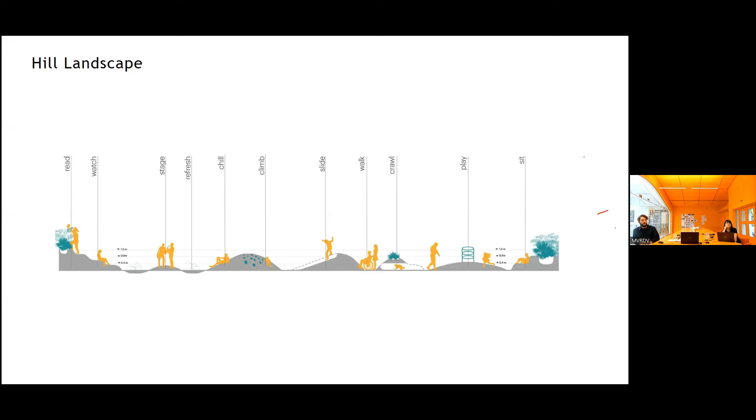As I said before, we want to be radical, and some will prevail over the others, even though we tackle all of them. So our main idea, or what we brought into the project, was the idea of creating this sort of hill landscape, a continuous landscape that will form and shape and create these pockets of activity through this street.

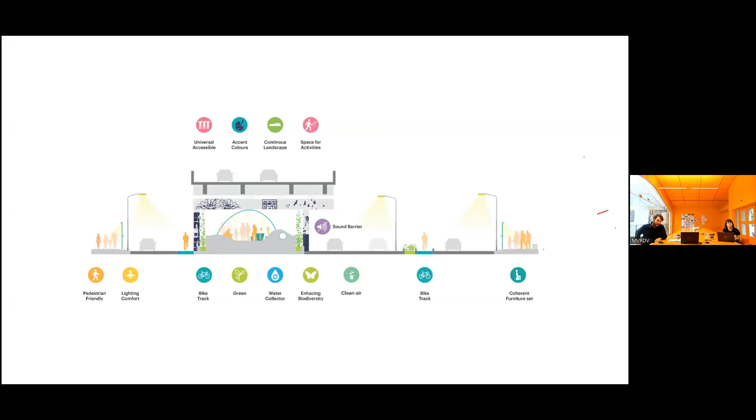From this current section where you see noise pollution, lack of street furniture, lack of green, difficult accessibility, we wanted to go to this new street, a vibrant street, with a space under the flyover where people can meet, can gather, can play, can attend a concert, and also a space for green, for that biodiversity, facing the beautiful indigenous plants that you have in India.

So in the end, we propose this hill landscape. Also related, what we add is this sort of tone of blue. So this hill landscape, this shade of blue, will give the identity needed to this strip of land.

But then, what we also think of is you cannot have a monotonous landscape. We wanted in this space to create these urban rooms, different rooms with different identities, but always following the same concept of the hill landscape.

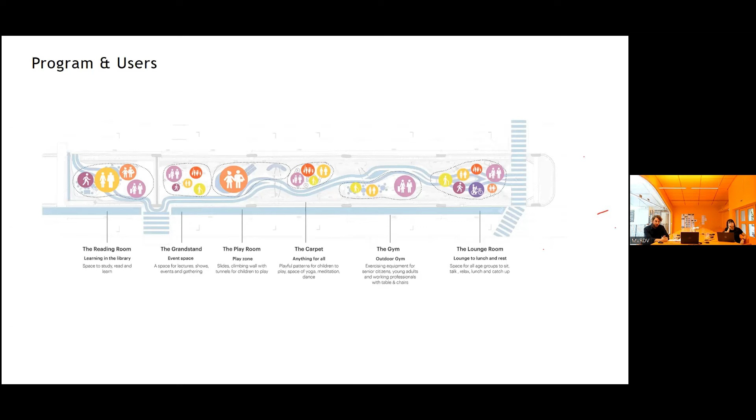So in the end, this street is a correlation of a reading room, a grandstand, a place to play, or to lounge. Each of these rooms is targeted to a specific user. So in the end, thanks to that, we are able to collect all the different users that we wanted, and we are open to everyone from everywhere, trying to achieve 24 hours of activity.

So we can move from this lounge room, moving through the gym, through the carpet where the kids can play, the playground, the grandstands, and the reading room.

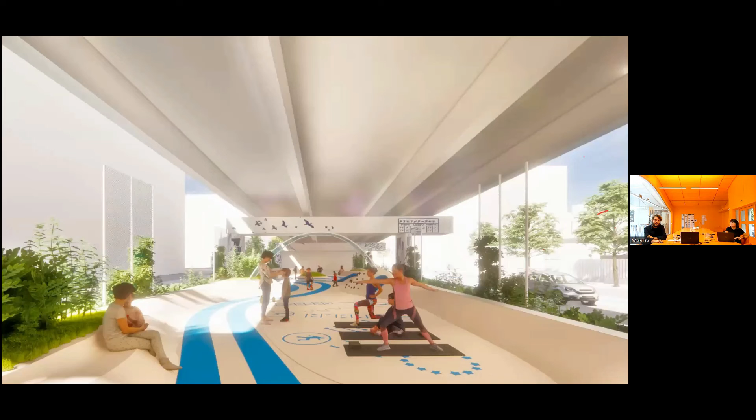These are a few impressions of how we basically envision this space. I might say here that the project is realized, is built. However, I invite all of you to go there and visit it. I cannot show you the latest pictures because we haven't received them yet, so we are going to just live with this series of renders that I think are quite close to reality.